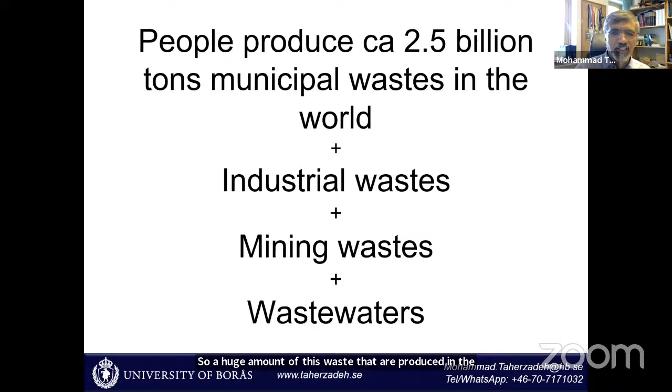But what we are going to talk about here is anaerobic digestion, which is actually a historical resource recovery method. It's not new. I tried to dig into the history: it's at least 3,000 years old, this knowledge that people used to heat up water, by the Assyrians in the Middle East. It could be even earlier, but I couldn't find anything; at least 3,000 years old is this technology. But what is this technology?

If I put everything very simply, anaerobic digestion, or AD as we call it, is practically a vessel which is anaerobic, where you don't provide air or oxygen. You put in your raw material, normally waste or wastewater, not always, but normally. And then you get two types of product: one is biogas, the other is fertilizer. That is the typical one.

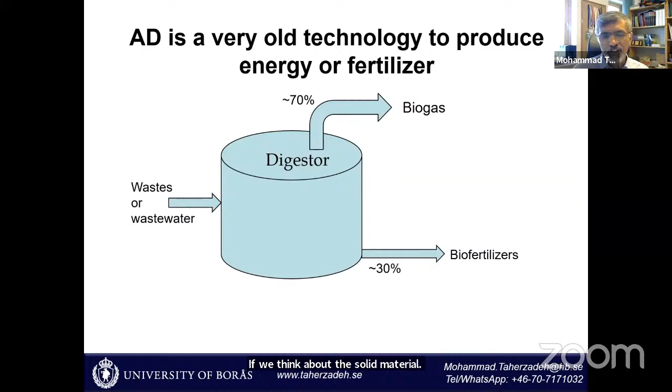If you think about the solid material, usually we talk about around 70% becoming biogas, and 30% ending up in the fertilizer. If you think of a slightly more complicated version of the same picture, in the raw material you can put agricultural residuals like manure, slurry, etc.

Or you can have energy crops, which are more valuable, like grass, maize, beets, and so on. You put this in a vessel and you keep it for a long time. Normally we take about 1 month; it's a rule of thumb. You produce some gas, which we call biogas, and then it goes to the different ways that it is used.

You can just do direct burning for cooking, lighting, heating, or cooling, and so on. Or you can put it in these gas burners, these engines, to produce cogeneration, as it is called, to produce electricity and also thermal heat, if you can use it. Or, the latest technology that we have, you upgrade it to biomethane.

You can use it directly for vehicles, or you can use it as a feed into the gas grid, normally in compressed form or in liquefied form, so they call it LBG or CNG or CBG. The rest of the material you can normally use as a biofertilizer, which also depends on the quality of your feedstocks. Sometimes you have to throw it away, but usually it's a fertilizer.

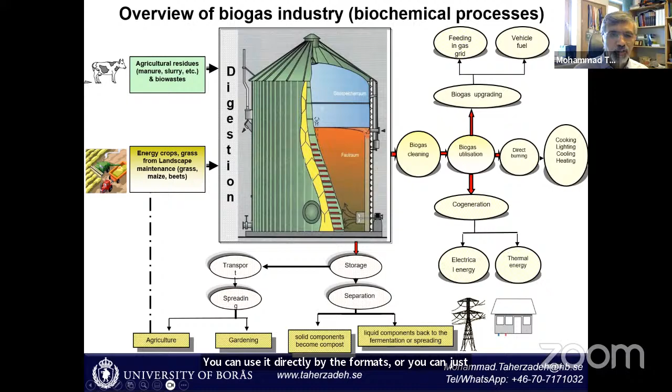You can use it directly by the farmers, or you can have different types of treatment, for example increasing the concentration, composting, and so on, to get the fertilizer out of it. But what happens inside this reactor? We put whatever we have, like food waste, sludge, lignocellulose, manure, and so on.

The first thing is that these are all macromolecules. You have some kind of hydrolytic bacteria which convert them into smaller molecules like sugars, fatty acids, amino acids, and so on. Then you have other microorganisms that convert them into volatile fatty acids. These microorganisms are called acidogens and acetogens.

Acidogens normally convert them to acids from caproic acid, which is C6, down to smaller ones, valeric acid, propionate, butyric, and so on. The next group, the acetogens, convert them to acetic acid and hydrogen. And finally, you have the last group, which converts this acetic acid and hydrogen to biogas. All these microorganisms have a perfect synergy, working together to convert our waste material into biogas.

One thing you should keep in mind is that the first groups, hydrolytic bacteria, acidogens, and acetogens, are normally facultative, and the methanogens are normally obligate anaerobes. So if you have a little bit of oxygen, usually the first groups keep working, but the last group, the methanogens, has difficulty and cannot grow any longer. This is one important factor that we should keep in mind.

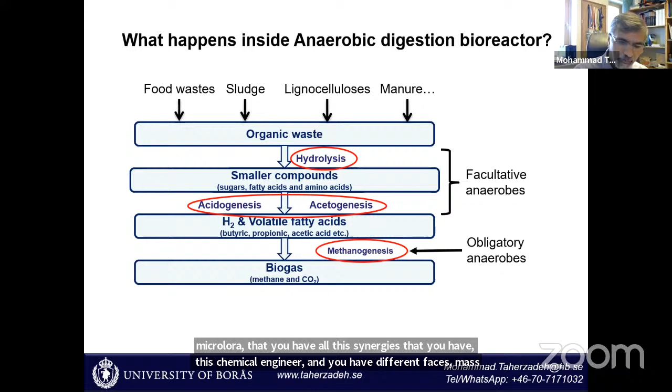This technology looks pretty complicated, and if you think about the science, it is maybe one of the most complicated systems in terms of the microorganisms, the microflora, with all these synergies, chemical engineering, different phases, mass transfer, and so on. That is quite a complex process. But the beautiful part is that if you look at how you can make it, this type of technology is not so difficult.

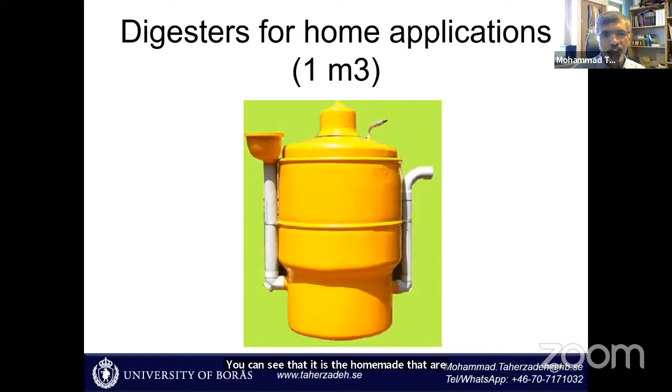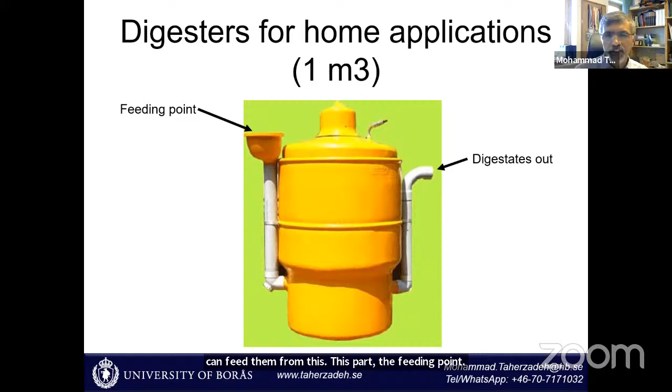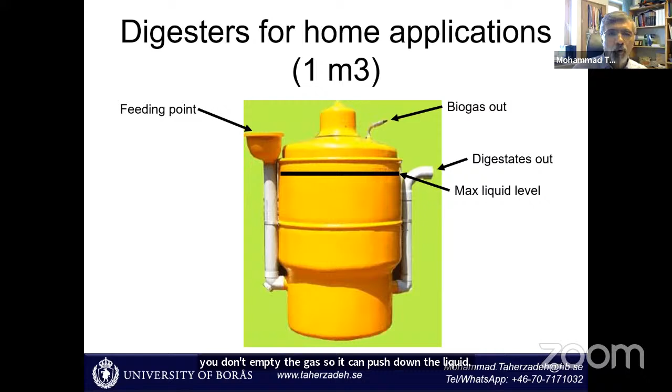You can feed in from this part, the feeding point, and then take the digestate out from the other side. The maximum level of the liquid inside is almost similar to the digestate outlet. Normally we take about 1 cubic meter as a typical size, and the gas comes out from the other side. If you don't empty the gas, it can push down the liquid. It works, and many homes actually have such a system.

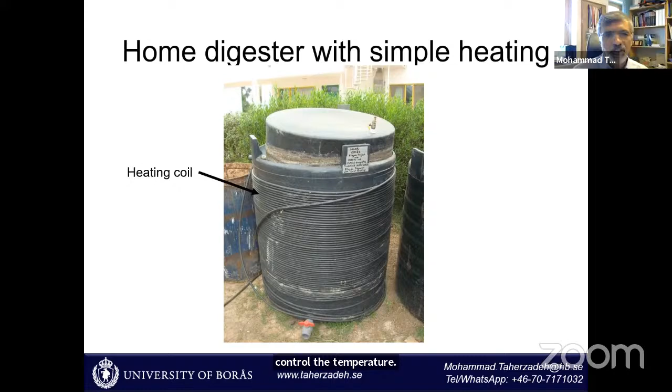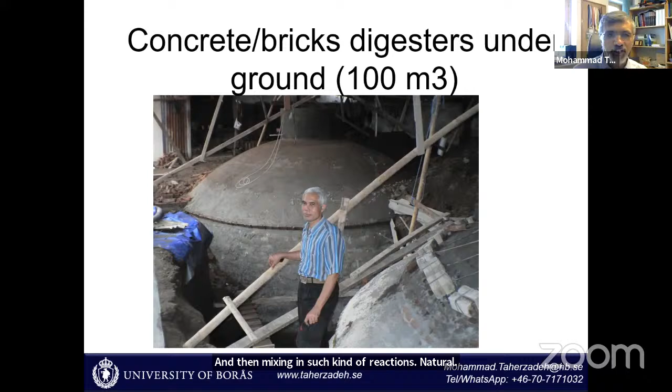One important point in this reactor is that you don't have any mixing in such kind of reactors. You have natural mixing by feeding, and then by the gas which is formed. So you create some kind of mixing inside the reactor.

Another one we developed here in our university together with a textile company, and it is now sold in many different countries. It is a textile digester; the material is textile, but it has different types of coating in order to be resistant against all the microorganisms inside and the weather outside and so on. Normally, the typical size of such a reactor is between 10 to 100 cubic meters. Perfect size for canteens or if you want some kind of temporary biogas and so on.

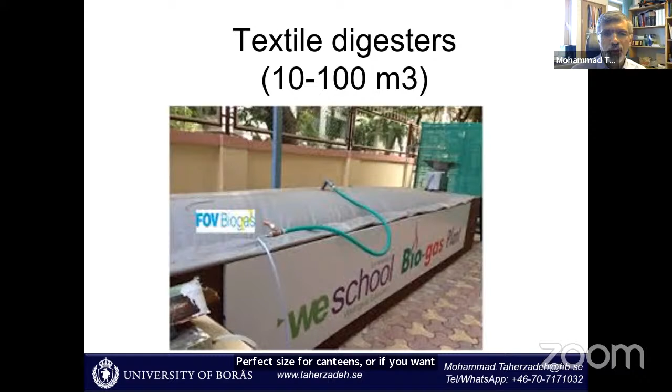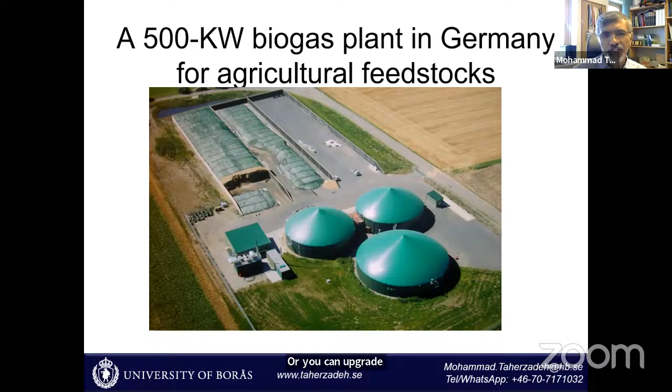If you make it a little bit more complex, you have this type of farm-based bioreactor. This one, for example, is 500 kilowatt, for agricultural feedstocks, which is very common in, for example, Germany. You cultivate whatever you can on your farm, then you collect the material, as you can see in this green part, and then you feed it slowly through the year into your reactor. You produce biogas, burn the biogas, produce electricity and sell electricity to the grid, or you can upgrade it and sell the pure gas to the gas grid. This type is also very common.

If you make it a little bit more complete, this is one typical more advanced digester. This picture is from Denmark; I took it a few days ago. This biogas reactor is for food waste. The food waste coming in gets some kind of treatment, and then it goes to a different type of reactor. Food waste from homes or municipal, and also some agricultural waste, everything comes here, and then they produce biogas, upgrade it, and sell it to the system.

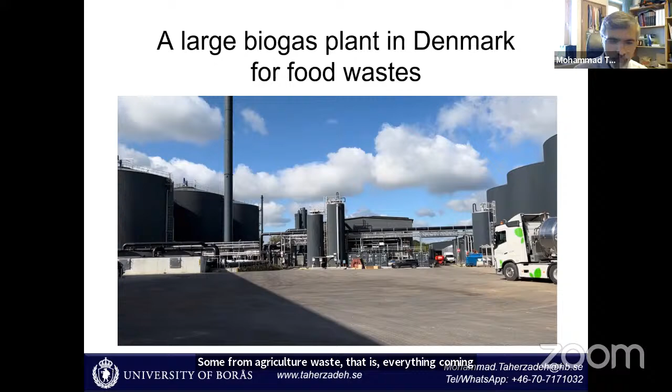If you put it together, we have something around 60 million home-based digesters, the small ones, and around 30 to 40,000 industrial digesters in the world, the big ones, as you can see in these pictures. But especially the home digesters, many of them are not working. If I make a wild guess, maybe 40 to 50 million of them are not working, and around 10 to 20 million are working. This number is a little bit better for the industrial digesters. It's because the system is a little bit complicated, and if there is no knowledge, you have difficulty running it.

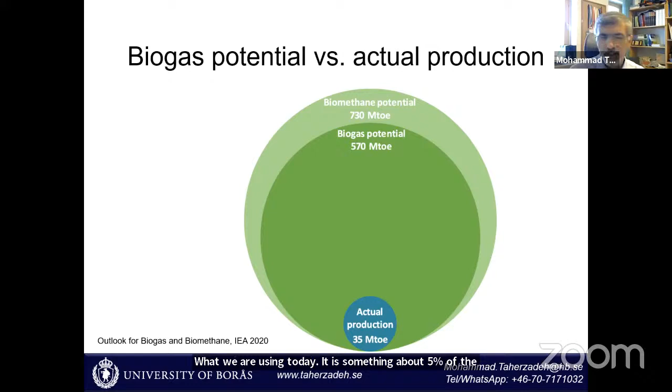But if you look at the potential we have in the world, these numbers are mainly for industrial digesters, not considering the homemade ones. The production we have is something equal to 35 million tons. And the biogas potential is around 15 times more, 570 million tons equivalent. And if you add thermochemical processes, especially from lignocellulosic material, you can have a biomethane potential of about 730 million tons. So what we are producing today is about 5% of the potential we have. So this technology is not used as much as it could be.

Those are the big ones in the world, especially the industrial ones. As you can see, Europe is the biggest at the moment. They use crops, this dark blue part, and also animal manure, which is quite a lot. Then you have this green part, which is municipal solid waste, and also wastewater, the yellow part. China is also growing quite a lot, especially animal manure and municipal waste. The US is especially municipal solid waste. And then you have the rest of the world, which is producing, but still not as much as it could be.

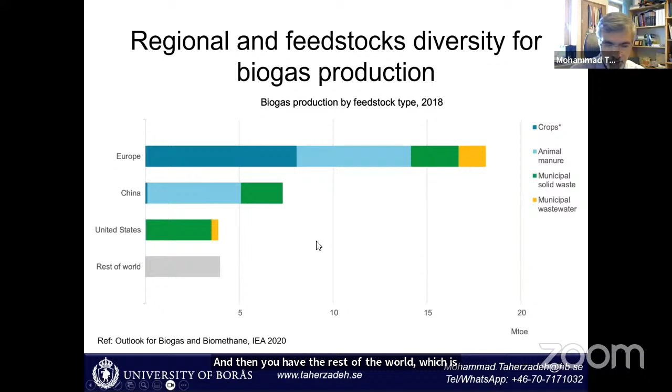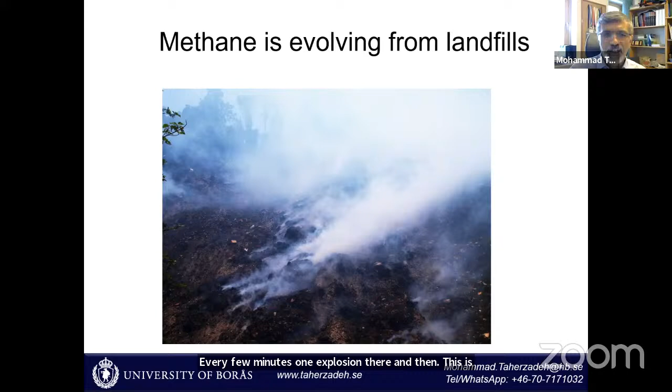And you should also keep in mind this landfill gas. Methane, if you consider the greenhouse gas effect, is something around 21 times more than carbon dioxide. It is a short-lived pollutant, which is quite strong. But the first question, which is also quite common in the world, is can we recover this landfill gas? In this picture that you can see, it is not recovered. It just goes to the air.

A number that could be interesting for you. I made a calculation of how much gas would be in this landfill, and this specific one produced something around 40,000 cubic meters of landfill gas per hour. Think about it. I talk about 40,000 cubic meters per hour of landfill gas that is produced and just goes to the air. And that is one of the major greenhouse gas effects that we have in the world.

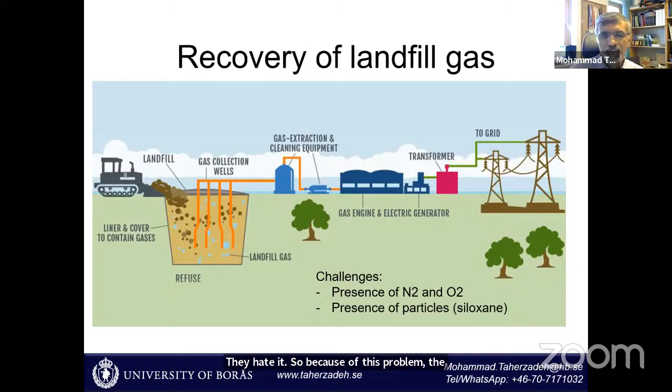And that is abrasive for the engine. So when it goes to the gas engine, that is quite dangerous. Actually, it can cause corrosion or erosion of the gas engine, and they hate it. So because of these two problems, the application is quite limited, and the recovery of landfill gas becomes relatively expensive. And normally there are three types of technology that are used.

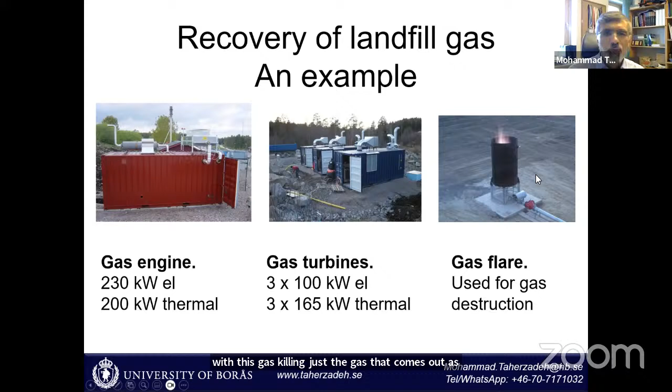Or if you cannot use it, but at least you want to reduce the greenhouse gas emission, then you can flare it, you can burn the gas, and that is what you have in this picture. So the flare is also quite common. If you want to burn it, then you don't have the problem with gas cleaning; the raw gas that comes out, you can just burn it like this. But you don't produce anything out of it, so you don't have any gas recovery actually.

But then one issue which comes in: can we merge this biogas technology that we discussed and also this landfill? And that is some technology that started around 20, 30 years ago, and since the last decade it became more and more popular. And that is something which is called dry digestion.

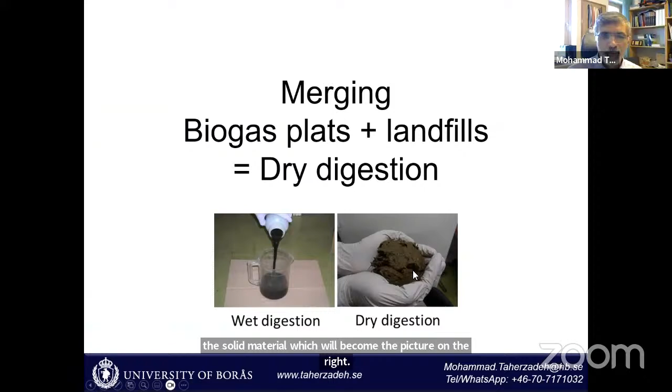So if you compare these two technologies, if we talk about wet digestion or wet fermentation, you have a slurry in this picture on the left, which is around 10% solid material, 90% water. So you can see it's pretty liquid. But if this material contains a much higher content of solid material, it becomes dry digestion, which is the picture on the right, which normally contains around 30 to 50% dry matter or total solids.

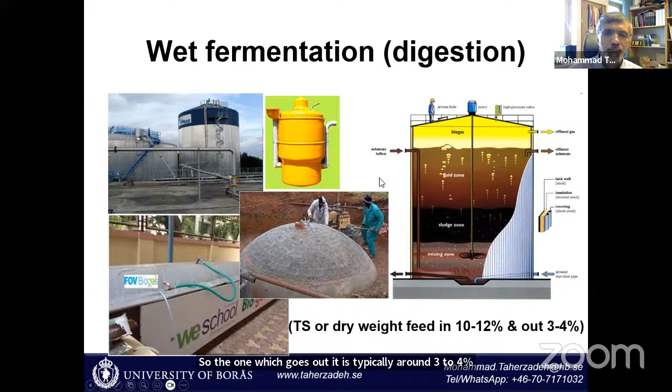All the technologies that I showed you before are wet fermentation. In this reactor, for example, they feed in a TS or dry weight of around 10 to 12%. Part of the material inside is converted to biogas, so the total solids become less, and what goes out is typically around 3 to 4% if it works properly. But if you work with dry digestion, you feed in 30 to 50%, and what goes out could become a slurry of around 5 to 17%.

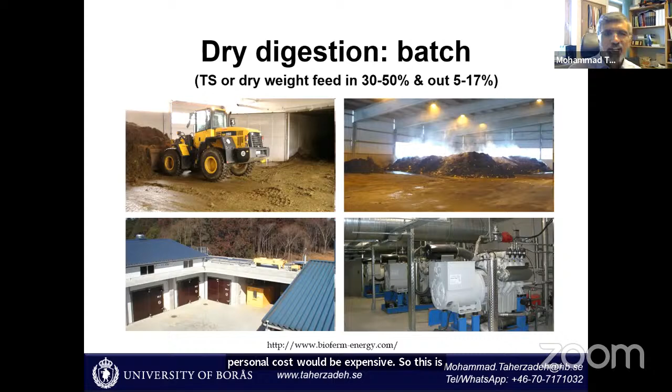When you close it, they start to produce gas; you collect the gas from this pipeline you can see on the roof, and then you put it on the engine and produce electricity. After it's finished, you take some of the material out, keep some of it, mix it with new fresh material, and close it again. So it works well, but it involves a lot of manual work. If personnel costs are expensive, this is maybe not so economically attractive.

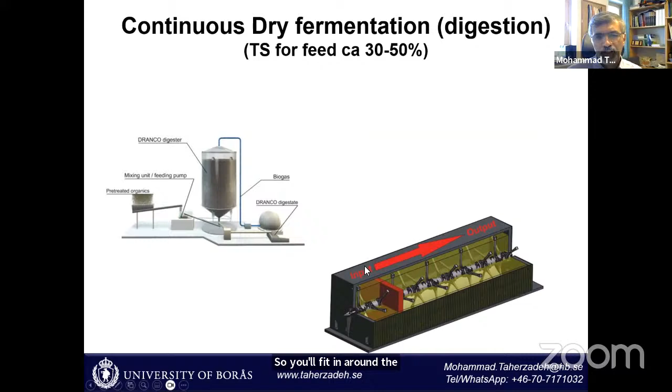But this one also was not so popular, and we didn't get a breakthrough until we got a horizontal reactor, which is pretty much the same but lying down. We have two technologies which work. This one is named Kompogas: you feed in from one side, and the mixer inside moves very slowly and pushes the material toward the front. You feed in around 30 to 50%, and also add a little bit of inoculum in the inlet. What goes out depends on your running conditions, typically around 10% TS.

Another technology is called Strabag, pretty much the same but a little bit different. You have back mixing, with some kind of mixers inside the reactor, and in this one you don't need to feed in inoculum. So it is more like a CSTR reactor. The first one was like a plug flow, and this one is a little bit more CSTR.

So because of this back mixing that is provided, you get a pretty similar condition through this reactor. And both of them are quite popular, and they are used everywhere in the world.

So with this horizontal technology, we got a breakthrough, and now many countries, if they want to install a new digester and their raw material is some kind of solid material like food waste, consider very seriously this dry digestion, because you don't have wastewater, and your water consumption becomes much less.

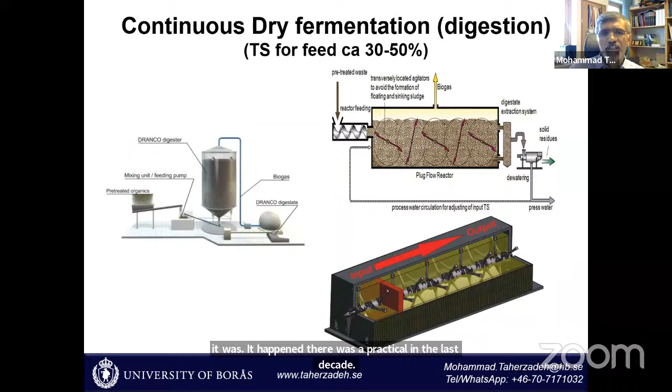But this dry digestion that I told you about happened practically in the last decade. We got a breakthrough, and now it is getting more and more popular. But then we go to this next phase, where now we have a lot of research going on, and then we start to see slowly also some kind of pilot, and then demo plant, and then more and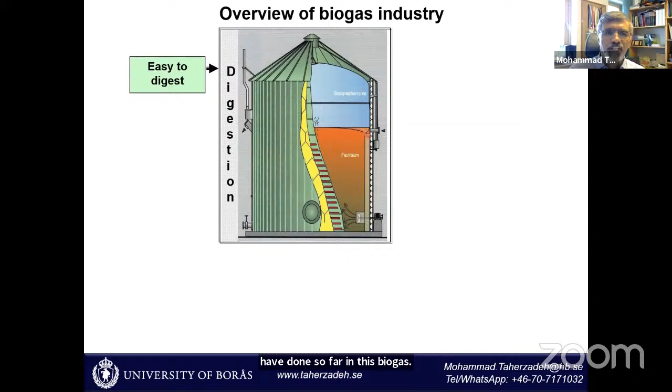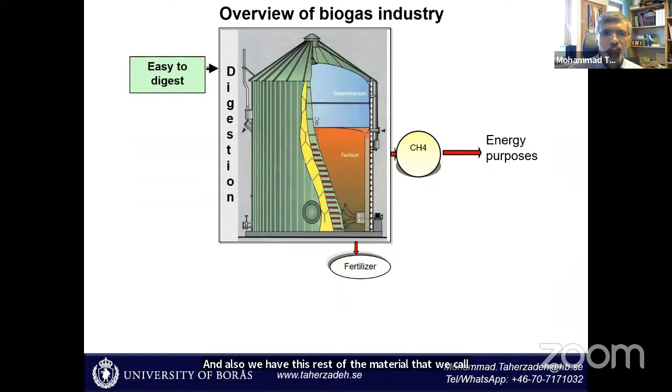more technologies. So if you look at our reactor again here, what we have done so far in this biogas industry: we have a material which is easy to digest. We feed it into the reactor, and then we get this biogas or methane out, which is for energy purposes. And also we have the rest of the material that we call a fertilizer or biofertilizer. This is the current technology, the state of the art in industrial scale.

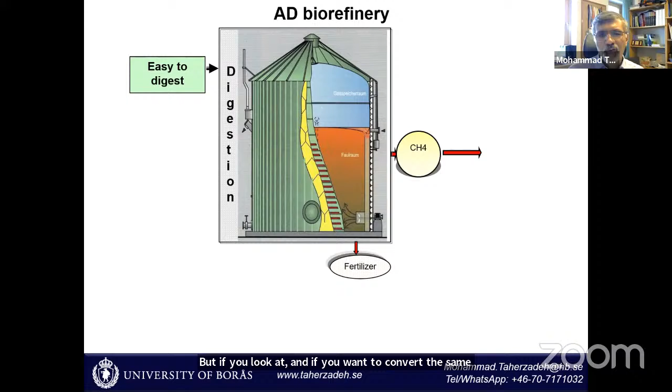But if you want to convert the same technology into biorefinery, we can develop it further. On the raw material side, we can give it material which is not easy to digest, for example toxic material, hard to digest material, or even indigestible material, all of them together.

And also on the product side, you can produce other things. In addition to the methane, you can also think about hydrogen. You can combine it with volatile fatty acids and also other nutrients. And then it gives you a little bit of flexibility in the product. In this way, the question is what you have and then what you want.

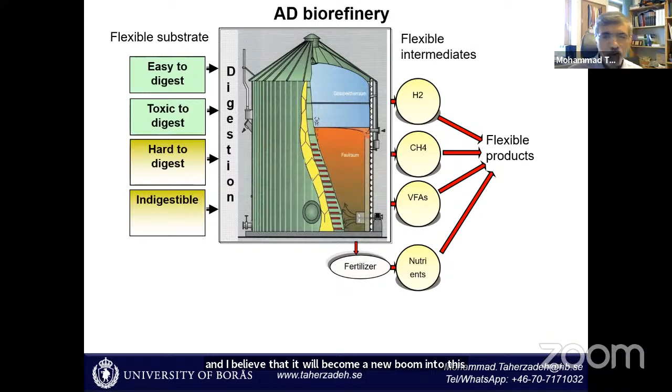Not only one specific raw material and one specific product, biogas, which is difficult to sell at the moment, not so easy. But if you can produce other types of product and also bring in other types of material, it becomes quite an attractive business for the industry. And actually I believe that it will become a new boom in this industry, and a huge investment will happen.

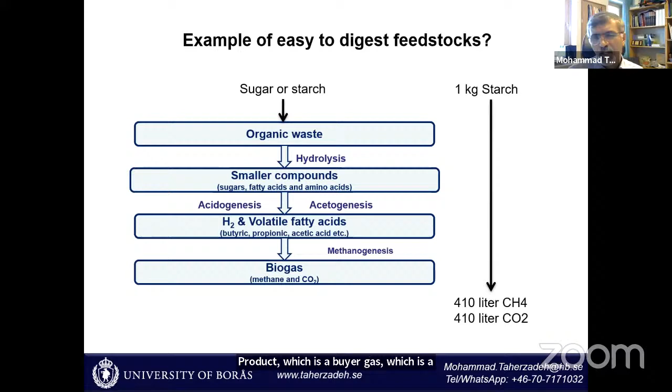So if you look at some examples on the raw material side, if you consider something which is easy to digest, for example sugar or starch. If you feed in the starch, everything will go through all the reactions that I mentioned before. If you put in 1 kilogram of starch, you get about 410 liters of methane and 410 liters of CO2. So you get about 820 liters of biogas, which contains around 50% methane. This is in theory, and in practice you get almost the same, not a big difference.

But if you take material which is not so easy to digest, for example citrus waste. Everybody loves orange juice or citrus juice. If you take 1 kilogram of orange juice, then you produce about 1 kilogram of citrus waste as well. I put this figure so you can compare food waste with citrus waste and see how much methane you get.

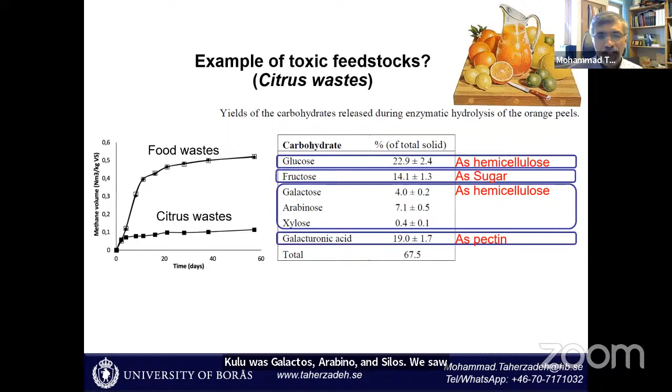The numbers are not comparable. From citrus waste, you get much, much less. And if you have a little bit too much citrus waste, the system totally fails. But what is citrus waste? You have fructose as sugar; glucose, galactose, arabinose, and xylose as hemicellulose; and galacturonic acid as pectin. All of them are actually perfect for anaerobic digestion.

But why did it fail? What is the problem here? The problem is in the peel oil, which contains around 90% limonene. The peel oil is the flavor, the smell of, for example, orange. Its major component is limonene, D-limonene.

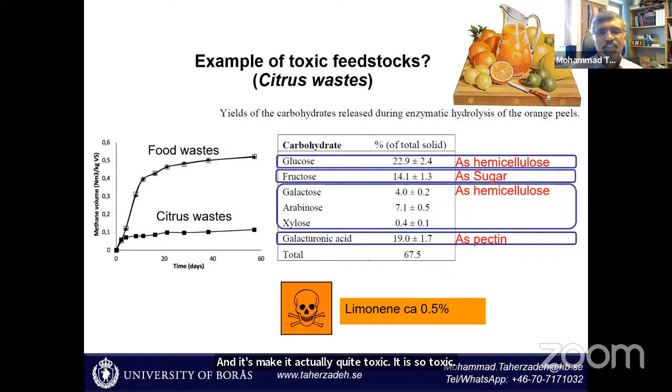And if you consider, this citrus waste contains around 0.5% of this limonene, and it makes it actually quite toxic. It is so toxic that it kills all these anaerobic bacteria. So if you put this citrus waste into this biogas, and if we look at the whole system that we discussed here, what is the problem?

We see that these microorganisms, which are a little bit more sensitive, first the methanogens, and then also acidogens and acetogens, they are the weak point of this system, and then it fails. So it means that the first part could work, but then you don't get any methane because of the failure of these kinds of microorganisms. They are too sensitive, and then this limonene can kill them.

And that is actually its job, because if you have, for instance, a citrus fruit hanging, an orange, this flavor has the function to protect it against all this mold, bacteria, and all the other microorganisms until it's matured. So it has a function, and if you put it in the bioreactor, then it fails.

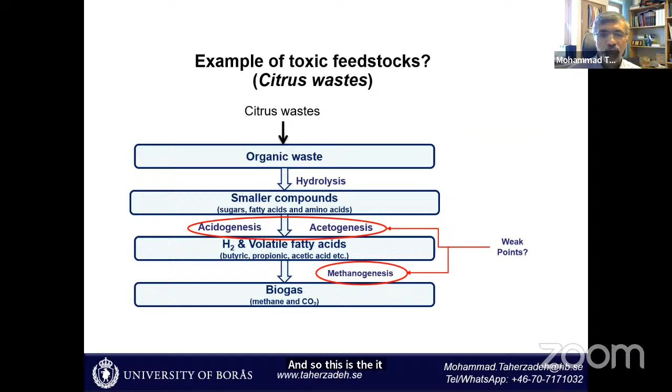Similarly, we also have keratins, for example in chicken feathers, wool, or human hair. These are proteins called keratin, and they also have quite a crystalline structure. You can see it in two different forms: alpha helix and beta sheets, and it makes it quite resistant.

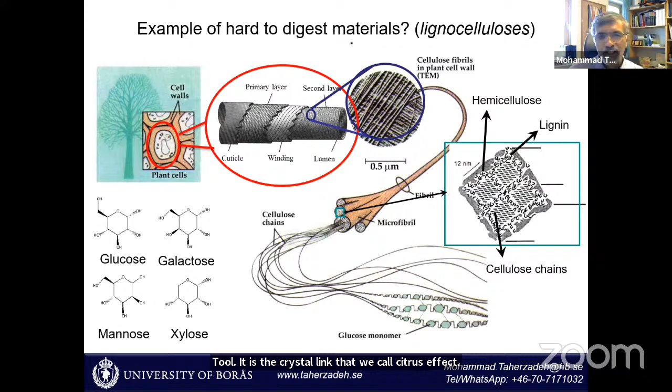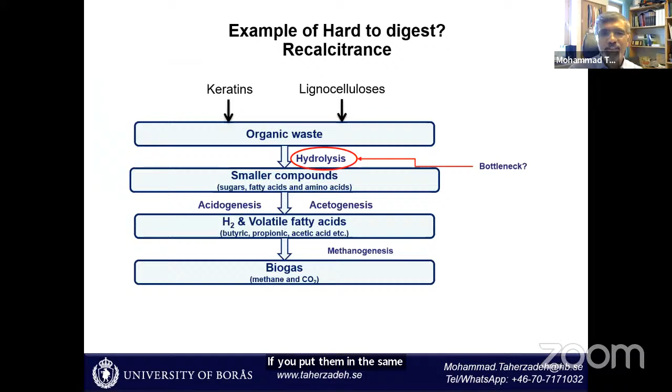So what is similar between this category and the previous one is the crystallinity, what we call the recalcitrance effect. These are carbohydrates which are recalcitrant, and this is protein which is also recalcitrant. Both of them have the same problem. If you put them in the reactor, the problem is the first category: the hydrolytic bacteria have difficulty and cannot break it down.

And since they cannot break it down, if you put a piece of wood in, maybe after 1 month you can just take it out almost as it is. It is not degraded. But if they can degrade this part, then the other microorganisms can do the job, and then you can break this down to biogas.

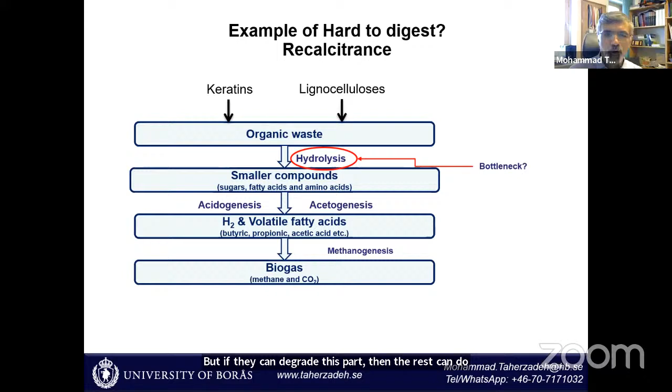So what we need is some kind of pre-treatment to remove these challenges with hard materials, materials that are hard to digest, or toxic materials like, for example, the citrus waste. And there are plenty of different pre-treatments. Some of them are physical pre-treatments.

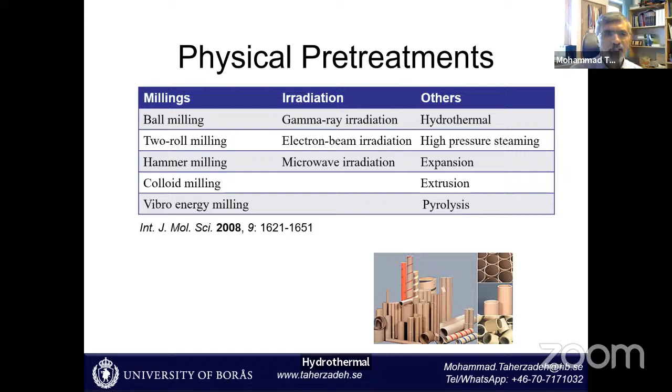You can put them in different categories: milling, irradiation, hydrothermal, high-pressure steaming, expansion, and so on. Or you can use a mixture of chemical and physical treatment together, or only pure chemicals. For example, you can treat it with explosion, like steam explosion, which is still physical, or together with other components like ammonia, carbon dioxide, or SO2, which is quite common in industry.

Or you can add some kind of high pH, like alkali, which is sodium hydroxide, ammonia, ammonium sulfide is quite common, or acids or different gases, or even a high oxidizing agent, like, for example, hydrogen peroxide, ozone, and so on. And we also get some more chemicals there, which I don't go through, but they are very common. In total, we have something around 40 different pre-treatment methods that could be used here.

Then, if materials are not digestible or have very low biodegradability, even this pre-treatment could be difficult, or it doesn't work at all. So what to do? For example, if I take plastics, or a big piece of wood, and put it in the reactor. If you put a water bottle, plastics especially, which is quite difficult with all these anaerobic digestion plants, in the reactor, you wait for 1 month, everything else is converted, and the plastic will stay as it is.

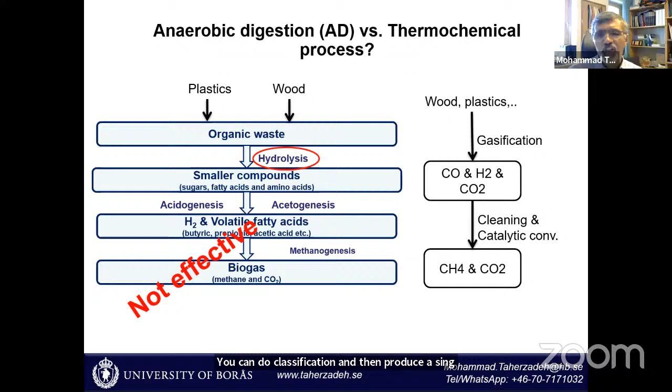You can do gasification and then produce syngas, which is this mixture of carbon monoxide and hydrogen. Normally, you also have carbon dioxide with it. These three are usually together. And also, you have a little bit of other impurities. It should go through some kind of cleaning of this raw gas, and then you put it in the catalytic conversion to produce methane.

This technology, at least for wood, I know is existing, and it has been tested in a larger demo plant, but it is quite expensive actually. And the problem is the second part, the cleaning of the gas and also making exactly the ratio that you want. It's important to have a specific ratio of carbon monoxide and hydrogen for this catalytic conversion and no other impurity, because they are toxic to the catalysts. So it makes these two technologies quite expensive.

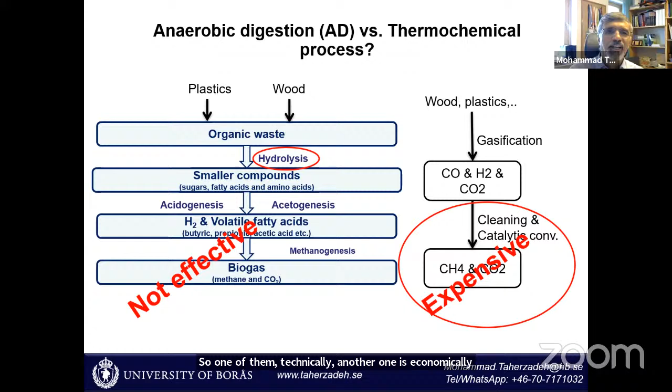So it means that if you have such a kind of material, the first one, which was anaerobic digestion, is not effective, it doesn't work. The second one could work, but it is quite expensive. So economically, it doesn't work. So one of them fails technically, the other economically. Then we came to another idea: we take this technology and remove these parts which are expensive or don't work.

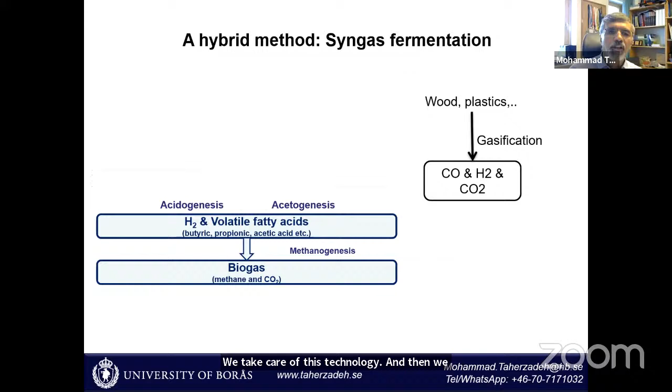So the first part of anaerobic digestion, I remove it, and the second part, which is the expensive part of this thermochemical process, I remove it. Gasification is not expensive, it is quite common. And the other part of anaerobic digestion could also work. So what we can do, actually, is connect these two to each other. You can take such material, it can go through gasification, you produce syngas, and then you convert this with the help of microorganisms and produce biogas.

This technology has been studied for almost 10, 15 years. There are different groups developing it in different ways, and they are solving different types of technical issues. And I would say that it is quite mature now. In combination with other technology, it can come to the market. Actually, the current technology is quite attractive to come to the market as it is now.

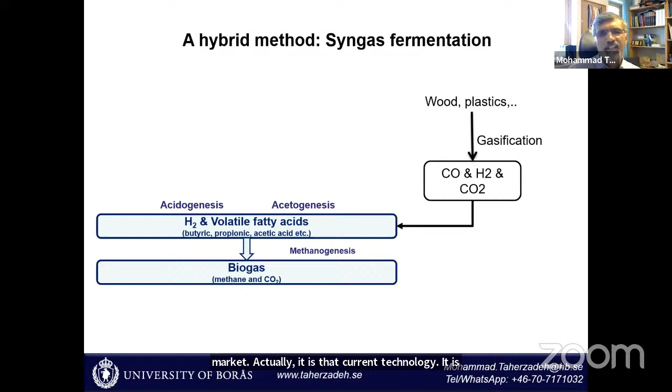Then we come to the next phase of the work, which is: can we produce any other product with all this technology than the biogas or methane that we have discussed here? If you consider what I told you, that you put all these things into this process and convert the material into biogas, something we can do is focus on intermediate materials, and the attractive intermediates here are especially volatile fatty acids and hydrogen. I don't talk about hydrogen because it is already established.

A lot of people have worked on hydrogen production, and the technology is called dark fermentation. But we couldn't actually get it to a larger scale because it has difficulty competing with other hydrogen production. The yield is relatively low, and it has difficulty competing with other technologies if the goal is to produce only hydrogen, not the other things. But in combination, if you think about the biorefinery, although I don't talk about hydrogen, hydrogen could be an interesting and attractive part of the whole biorefinery.

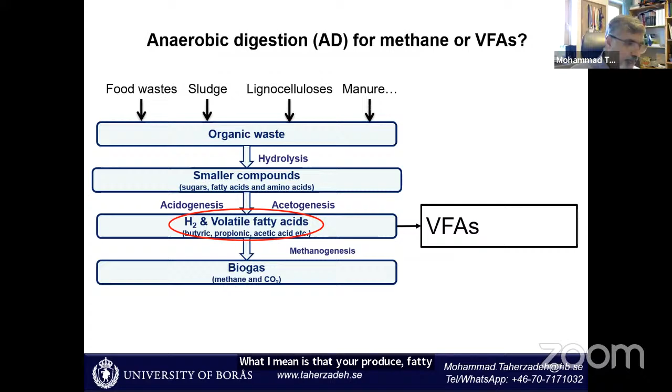I will talk a little bit more about the other part, which is a little bit less known: the volatile fatty acids here. What I mean is that you produce volatile fatty acids, and then you use them for different purposes. But before I talk about this, what is the volatile fatty acid by itself? It is a mixture of different acids, from 2 carbon, which is acetic acid, to propionic, which is 3 carbon, butyric 4, valeric 5, and caproic or hexanoic acid, which is 6 carbon.

These are pretty commonly produced, and depending on the method you are using, your feedstock, your conditions, everything, you can have a majority or domination of one of the group. For example, acetic acid could be dominant, or you can have domination of another, or a total mixture of everything. This material could be used as a mixture, or the acids could be used separately from each other. And I will talk a little bit about some of the applications that we are working on.

But you can imagine that if you consider the individual acids, each of them is a chemical commodity. Acetic acid has a very large market in, for example, solvents, chemicals, food, and so on. Propionic acid has a very large market in paints, butyric acid in perfume, and so on. So all of them are commodities, and they are quite valuable materials if you produce them separately. It means that you can use them together, or you can separate them and sell them to the market separately.

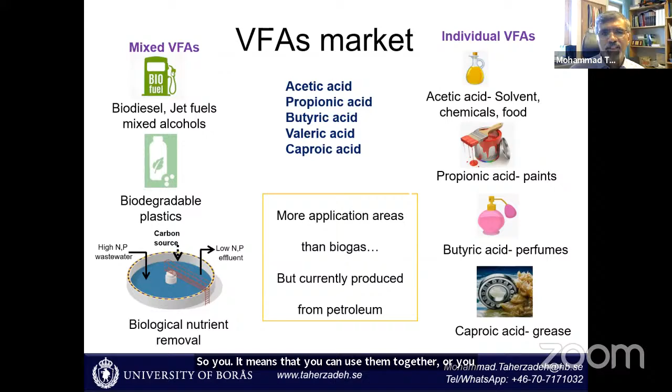But if you want to produce them, what could we do here? In the process, these are intermediate products. It means that they are produced continuously and they are consumed continuously. So if you want to produce them, you have to boost their production to make more and more volatile fatty acids, and you also have to inhibit the consumption part. These two you should do together. You produce a lot of volatile fatty acids, and then they shouldn't be converted to biogas.

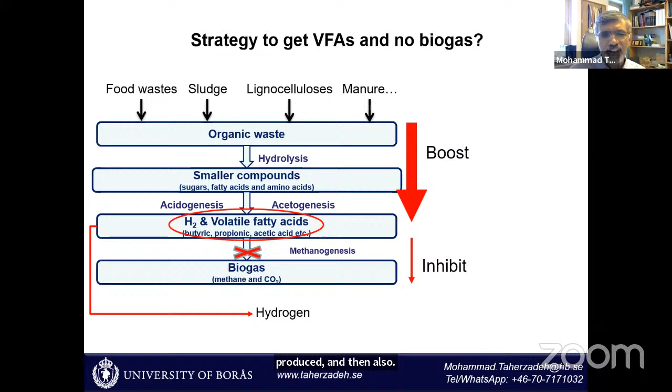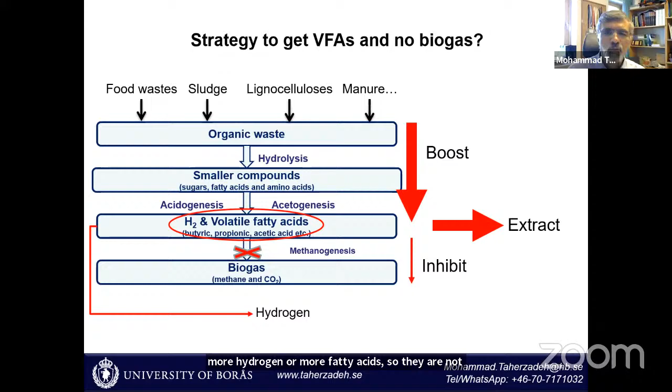When you do it, hydrogen is produced and comes out by itself because it's a gas, but these volatile fatty acids are inside the liquid, and you have to extract them out of the system. You can also play with your conditions to produce more hydrogen or more volatile fatty acids, so they are not competing with each other. Normally we have both of them, but you can have more of one or the other in your system. If you want to increase the concentration or accumulation, normally you can work with some kind of pure culture.

Some groups are working with that, especially if you have some kind of material that a pure culture could consume; then it could work. Or you can work with bioaugmentation of a mixed culture to enhance it with some kind of microorganism, and then you can produce more. Then, for the inhibition of the methanogens, there are different ways. These methanogens are quite sensitive, as I told you before. You can use a chemical like BES, which is very common. You add a little bit, at the ppm level, and it kills all the methanogens.

Or an easy way is to work with a little bit higher pH or lower pH. Practically, if it's less than 6 or more than 8, normally you don't have them. Temperature variation, like a heat shock, can also kick them out. Or you can work with a low hydraulic retention time. For example, for biogas production, normally you need around 30 days. But if you work with, for example, 10 days, then the methanogens have no possibility to grow because they have a very long doubling time.

Or you can work with this high organic loading rate. Or you can have a little bit of oxygen. You remember what I told you in the beginning, these methanogens are strict anaerobes. So if you have a little oxygen, actually you kick them out.

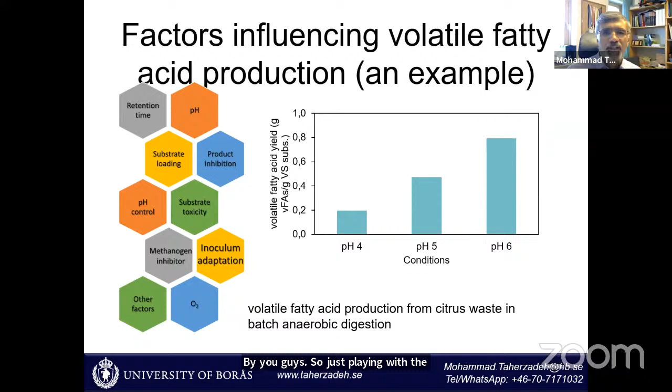If I give you one example of all these factors that I just tried to brief you a little bit about, and I take only pH in one experimental result: in this example we work with pH 4, 5, and 6. You can see that at pH 4 we got around 0.2 yield, gram VFA per gram VS of the substrate. But if you change to pH 6, you get around 0.8. And if you work with pH 7, practically you get nothing, because everything is converted to biogas. So just playing with the simple pH, you can produce plenty of these volatile fatty acids.

And then the second question is that you have to take them out. That is actually one issue that we could develop at our university. Many people have tried this in different ways, like centrifugation, adsorption on activated carbon or different types of resins, or chemical extraction. And also the membrane process, the latest one, which is now getting more and more common, and different groups are using it.

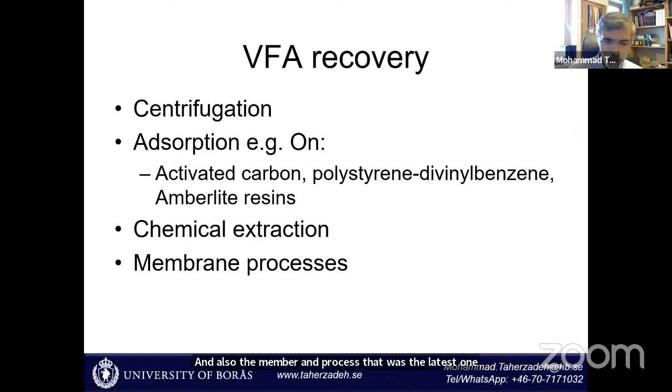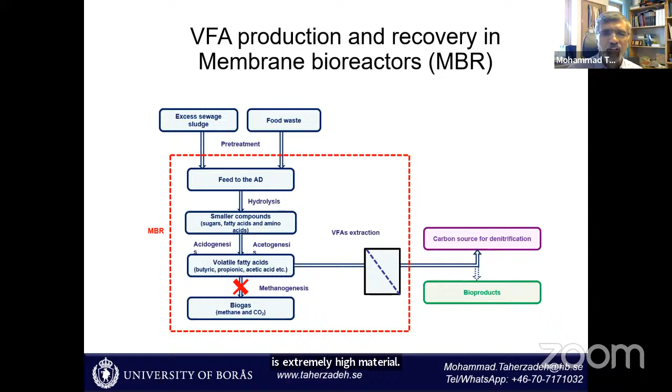In this membrane one, you use a membrane bioreactor to produce volatile fatty acids. You put this membrane inside, you inhibit the biogas formation, and then you extract this material continuously. We developed it some years ago. If you go back 10, 15 years, this system could work maybe only for 1 hour, nothing longer, because the membrane usually clogged. But we could develop a system that could work for years without any stop, and also with very high TS. We have tried up to TS 20, which is extremely high. But if you run, for example, TS around 10, it can work forever without any problem.

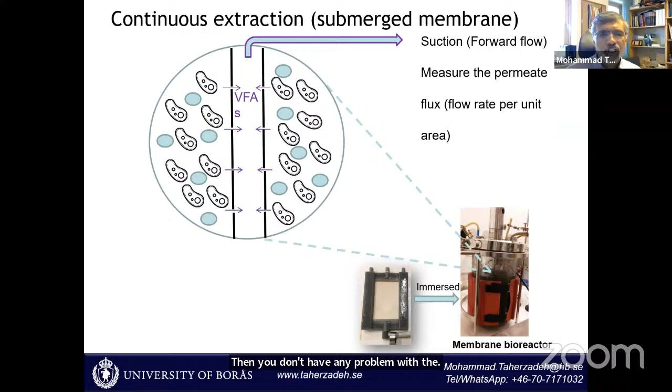In this picture I show you how it works. The membrane panel looks like this on the bottom, and this is a picture of our reactor. You put this membrane inside; the membrane is the black part in this picture. When you create some transmembrane pressure, practically you suck the liquid out of the system with a millibar pressure difference. So you get this liquid out of the reactor. And if you choose the right pore size, it is quite pure, and you can keep it running a pretty long time without any problem.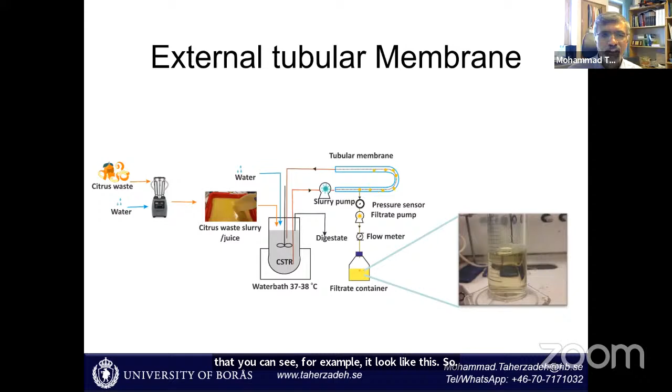Inside the reactor it is normally some kind of black material. Out of the reactor, it looks, I don't say like water, but something like green tea, as you can see in this picture. And if you do another membrane filtration, it becomes totally transparent. It looks like water which contains this VFA.

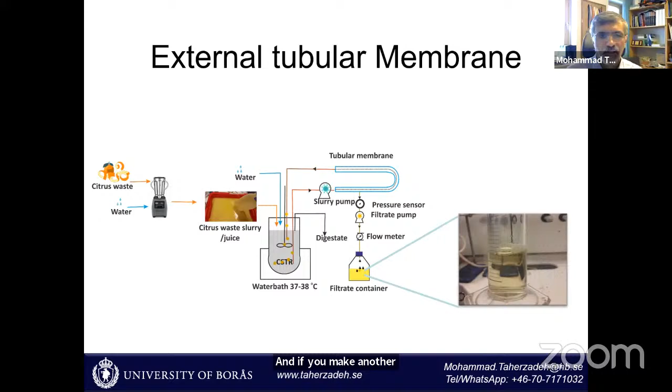So let me give you one result. If you take this reactor and put in some food waste, work with an organic loading rate of 2.5 gram per liter per day, control the pH at 5.5, then put this membrane inside and increase the organic loading rate.

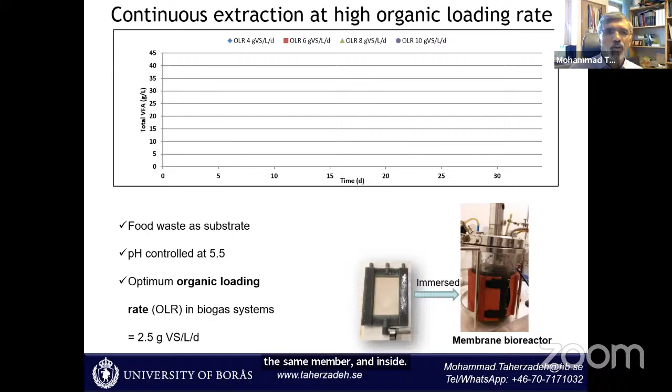You increase it to 4. You can see that we could get continuously something around 10 to 15 gram per liter volatile fatty acids. We go for 6, we get higher, to 8 higher, and then to 10 higher. And then we could say that we could get continuously something about 40 gram per liter volatile fatty acid. And when you come to this level of concentration, actually that would be quite interesting for many industries, and you could use it for many different things.

We have worked with many different types of materials, like food waste, that is, I can say, the easy one. Toxic ones, like citrus waste, that we have worked with a lot. And then we work with cow manures, which contain a lot of lignocellulosic material. Chicken manure, something which contains a high amount of nitrogen. Wastewater sludge, or even indigestible material. So we work with many different types of things for several years, and we have many publications on this work.

But then let's say now you've done this work, and now you have a lot of this volatile fatty acid. The question, what can you do with it? And that is the interesting part, which I show you some of the work that we are doing, but I can tell you it's like we say a drop into the sea, because there are so many applications, so many possibilities that could be done.

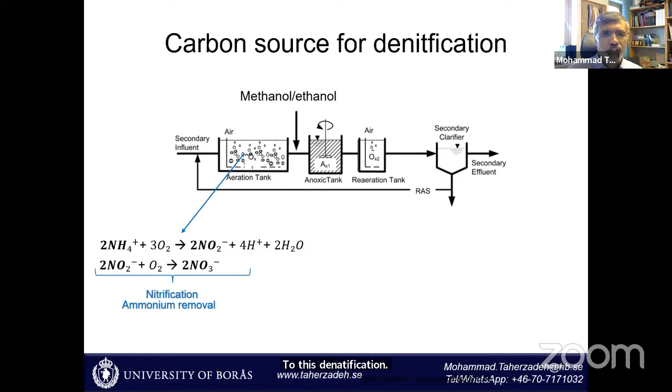If you work with wastewater treatment, especially when you want to have a complete wastewater treatment, in addition to reducing the COD and BOD, you have to also do denitrification. The goal is to remove the nitrogen, and then you normally have 2 steps. The first step is called nitrification, where ammonia is converted to nitrous oxides. And then you have denitrification, where the nitrate, NO3, is converted to nitrogen.

And then you have also the phosphate removal that would be at the end. So your wastewater comes to an acceptable level of COD, acceptable level of nitrogen, acceptable level of phosphate. But the problem here, and actually that's why not many countries are doing this work, is that after nitrification, which is aerobic, when you come to denitrification, you have this NOx that you have to work with in an anoxic tank, so no oxygen, in order to consume this NO3.

And in order to do that, they need some kind of methanol or ethanol, some kind of carbon source that would be easy to consume. And we have it in Sweden. I would say almost all wastewater treatment plants, and in many European countries, denitrification is part of the wastewater treatment. It is something that could be done, but they are expensive.

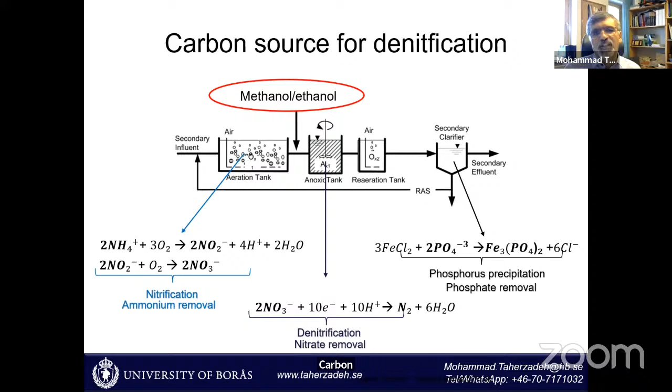If you use methanol, it is fossil-based, which is not good if you calculate the carbon footprint. And if you want to use ethanol, it is quite an expensive material, and then it has an economic issue for the wastewater treatment plant. So what we say is that you can remove this material and put instead volatile fatty acids, and that is quite interesting. They can produce volatile fatty acids and then use them for denitrification.

So in this method, what could be done practically if you take the waste? For example, if you are in a wastewater treatment plant, you have a lot of sludge. You can take this wastewater sludge, put it through anaerobic digestion that is normally available there, but you just add a membrane bioreactor to produce enough volatile fatty acids, and then you use it as a carbon source for your own denitrification. So without any additional material, they can convert their own sludge to get volatile fatty acids for their own use. Or if they bring other types of waste, like food waste, into their biogas plant, they can also do the same thing.

The second method that we are working on is that we convert these volatile fatty acids to PHA, which is polyhydroxyalkanoate, which you know is quite an interesting, attractive bioplastic. And if you take, for example, acetic acid, it is converted directly to acetyl-CoA, and then within 2 steps, it is converted to polyhydroxybutyrate.

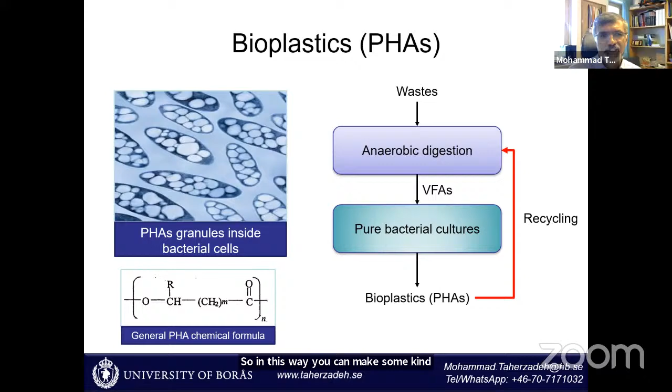The next one, which is actually quite attractive: if you consider animals like cows, or ruminant animals in general, they eat grass, and it goes to the rumen, and the retention time inside the cow stomach is around 3 days. Within these 3 days, the material is cut in size by chewing, and then the bacteria in the rumen convert it to volatile fatty acids, which are absorbed by the body through the rumen, and then you get milk or whatever from this material. So practically, VFA is the energy source of these animals.

And if something goes wrong and you have further conversion of this VFA, you get methane. That is one difficulty with this type of industry and animal husbandry. And also within these 3 days, what cannot be consumed comes out the other side as manure. So then we had an idea: can we take, for example, cow manure, put it in our reactor, convert it to volatile fatty acids, and then give it back to the cows? That was our original idea.

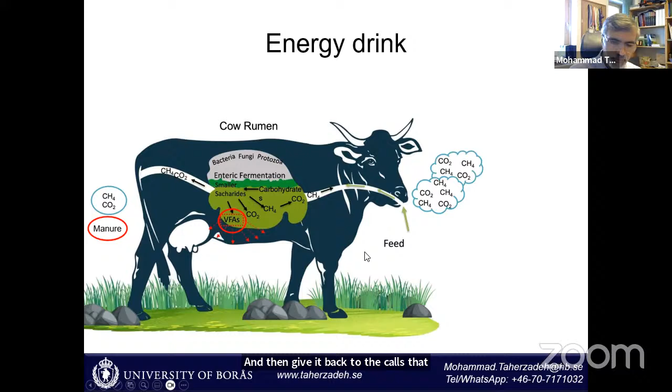This is the way we were thinking. We take this waste, for example manure, go to anaerobic digestion, produce volatile fatty acids, and make it clean, bacteria-free and everything. Since it contains VFA, the energy source of these cows, we give it to them like an energy drink, like Red Bull in Europe, to be absorbed directly by the rumen. We've done a lot of tests, also with in vitro digestion, and we got quite attractive results.

And then we wanted to do the in vivo trial. The first thing was that we had some ethical approval issues, and we were not allowed to use this manure. So we used some materials which are feed-grade wastes.

And then also this bacteria that we got, we were not allowed to use because of ethical approval, although technically possible. So we had to use it from this cow stomach. We took some kind of bacteria from this cow rumen to produce this part. Then we had another issue: we asked how much drink one cow needs, and they said something around 70 liters per day.

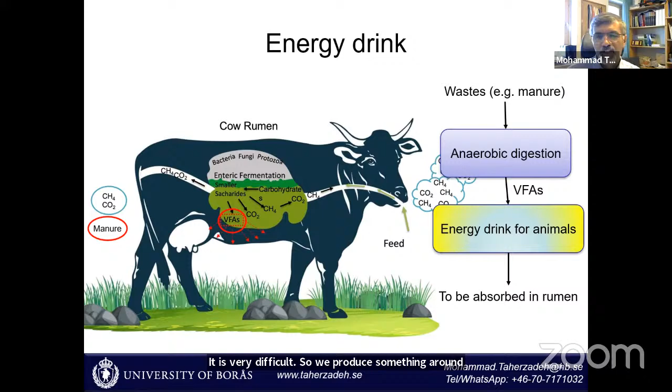And you know that in the lab it is very difficult. We produced something around 200 milliliters per day, so 70 liters was quite a lot. So what we did, we developed a big reactor. This one is 500 liters, and it has the extension possibility to 2.5 cubic meters.

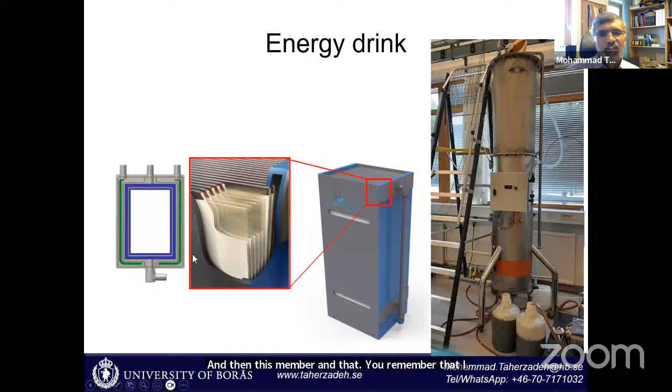And this membrane that I showed you before is now available in the market; you can buy it in some kind of panel. This panel that you can see in this picture has the same type of membrane inside, packed together in the form of a panel. This one has around 7 square meters. We put it inside this reactor, and it became a membrane bioreactor.

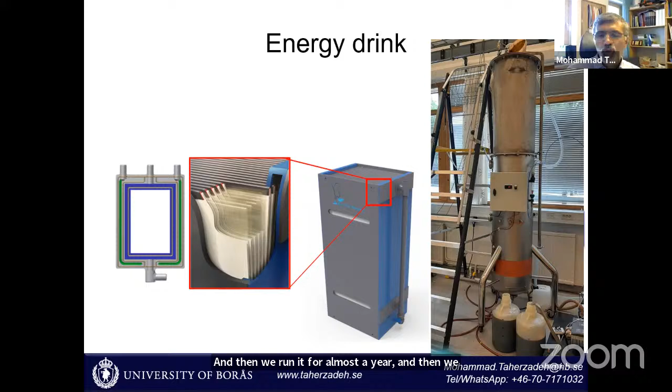We ran it for almost a year and produced a lot of these volatile fatty acids. Cows were still too big, so we couldn't run it with cows, and we ran it with sheep, which is practically another animal with a rumen, but a little bit smaller. We tested with sheep, with quite interesting results. We are still analyzing the results, and hopefully soon we get a publication out of this work. But it works quite well, I would say.

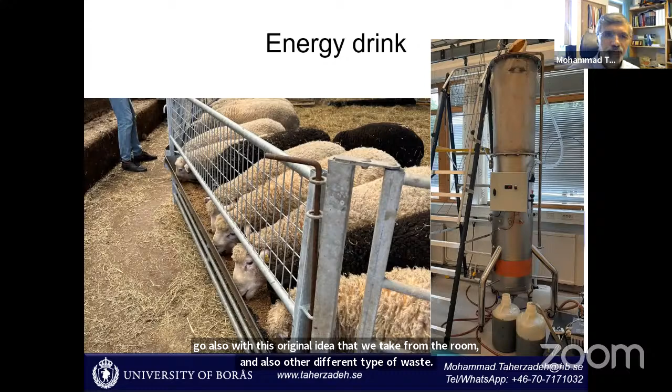And the first proof of concept, I would say, is that it works and it could be developed. And if we succeed, and if the ethical approval allows, then we can go also with the original idea that we take from the rumen and also other different types of waste, and use it for the same purpose.

And the last work that we have on volatile fatty acids is that we take the volatile fatty acids produced by anaerobic digestion and put them in a pure fungal strain, filamentous fungi. If you remember, I told you half of our group was working with filamentous fungi. So we used the same fungi and produced these fungi from volatile fatty acids. And since the liquid we're feeding also contains a little bit of the other nutrients, practically it had everything, so we didn't need to add almost anything.

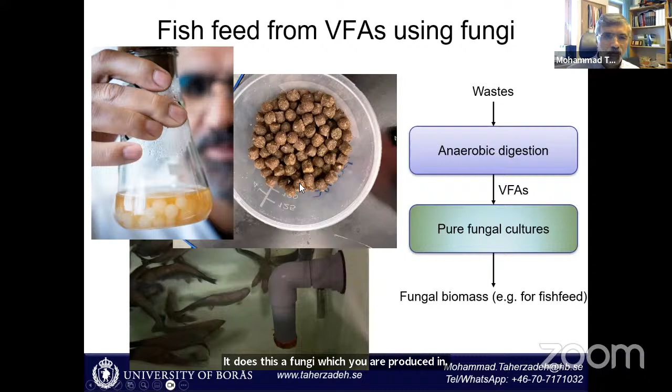So we take this and produce this fungi fish feed, as you can see in this picture, the one which is in my hand. It is these fungi which were produced from VFA, and we could convert it to fish feed and then test it with fish.

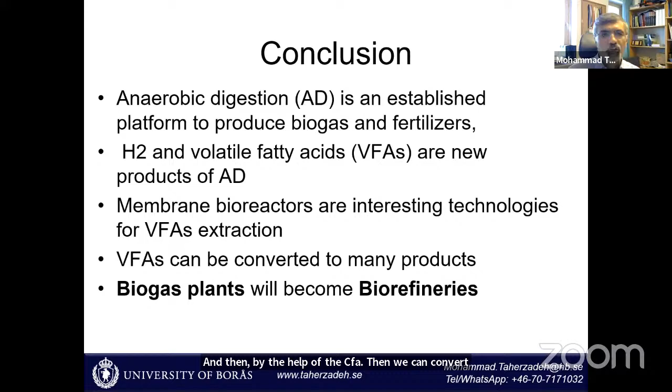With this, I come to my conclusion: anaerobic digestion is an established platform to produce biogas and fertilizer. Hydrogen and volatile fatty acids are new intermediate products, and a membrane bioreactor can take volatile fatty acids to the industrial scale and make a lot of new opportunities. With the help of VFA, we can convert a biogas plant into a biorefinery. That was all from me, and thank you very much.